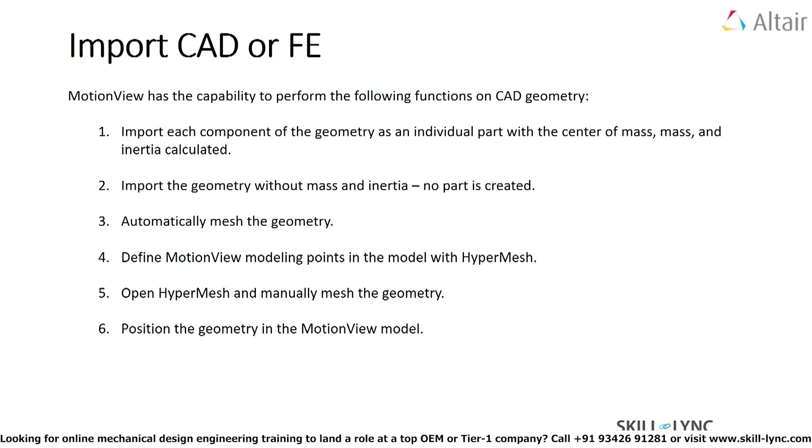Now let's discuss the various CAD or FE formats that are supported in the MotionView model. MotionView supports the following CAD or FE formats: you can import files from CATIA, HyperMesh, OptiStruct, Parasolid.

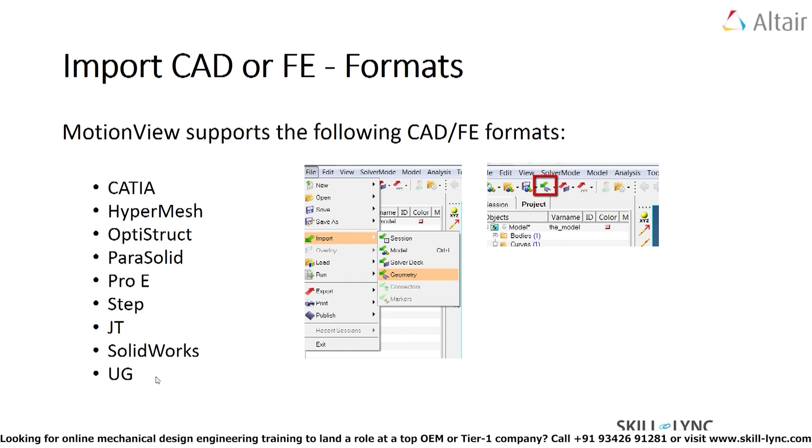It can be a Parasolid file, or from Pro/E you can import a STEP file, a JT file, any file from SolidWorks, and UG. Now let me invoke the CAD import utility by going to the graphical user interface of MotionView and show the various options available in this particular dialog box.

Switching back to the graphical user interface of MotionView, there are two ways of invoking the CAD import utility.

First, go to the File option, then go to Import, and from there you can go to Geometry. This brings up the CAD import utility dialog box.

This is one way of doing it, and the other way is by simply clicking on this particular icon which says Import Geometry on the toolbar. If you click that option, you come to the same dialog box you got earlier. This is just a shortcut.

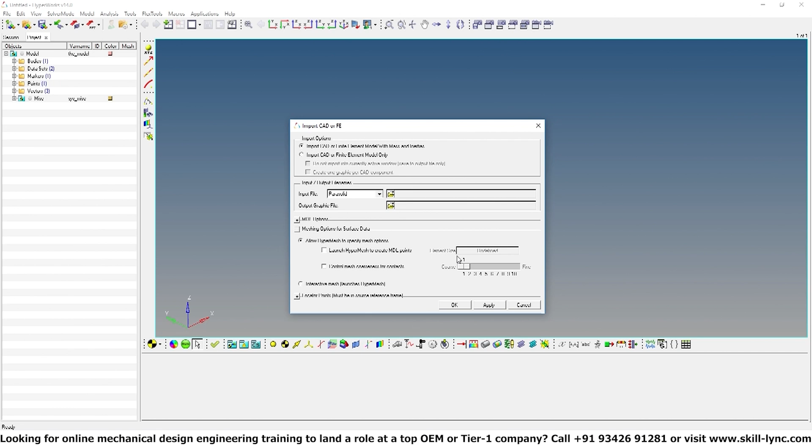Here it's divided into several sections: the import option section, the input/output file name section, the MDL section, the meshing options for surface data section, and the locator point section. These are the various sections in this particular dialog box.

Let's see what all these options refer to. Under the import options, you have two radio buttons. The first radio button, as the name suggests, is to import the CAD or FE model along with its associated mass and inertia properties.

Say you've built a model, or you have a model in CATIA, and you want to import that particular model along with its mass and inertia properties - then you'll use this first radio button. But you'll use the second radio button only to import the CAD or FE model without bringing in its mass and inertia properties.

It will just import the geometries from either a CAD file or an FE file. These are the two options available in MotionView.

Next, let's go to the input/output file name section. In the input file name drop-down menu, here are the different file formats you can specify to import your particular model. These are the extra file formats that have been added in the latest version, apart from the ones mentioned in the presentation.

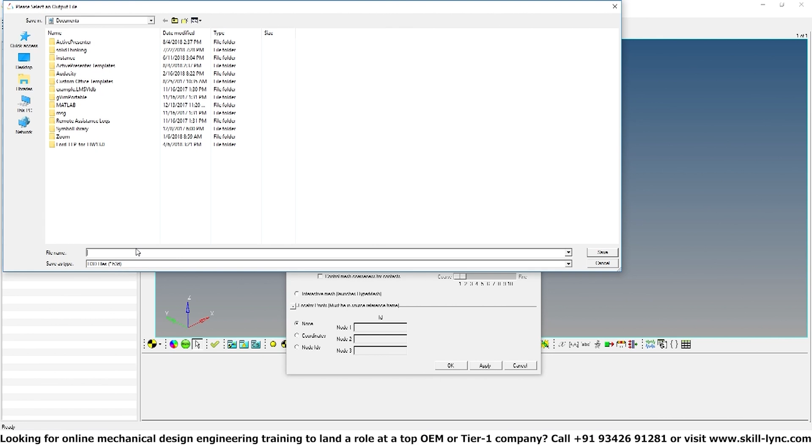You can select any particular file format, and this top folder, if you click on it, will direct you to the file you want to import. In this case, I've chosen the Parasolid file, so if there are any Parasolid files in the directory, it will point to that file. Once selected, click Open. The second folder is to save the file in H3D format. You can give whatever name you want, and it will be saved as a .h3d file that can be accessed in MotionView.

Next, the MDL options. The first radio button specifies the system under which the geometry is imported, and you can give necessary details for the body, point, graphic name, etc. You can usually leave these options as default unless you need to specify something for a specific case. Otherwise, leave this section as default. You can minimize or expand this based on your necessity.

Now let's move on to the meshing options for the surface data. This is an important section in this dialog box. If you select the first radio button, it will automatically mesh the geometry. But if you select the second radio button and say OK, it will launch HyperMesh, and you can interactively create the mesh.

When you select the first radio button for automatic meshing, you can also check the option that controls mesh coarseness for contacts. This is very useful when you come to contact simulation, covered in chapter 11. You need to be careful, because when dealing with 3D contact simulation, the two mesh geometries must have a relatively finer mesh compared to other simulations.

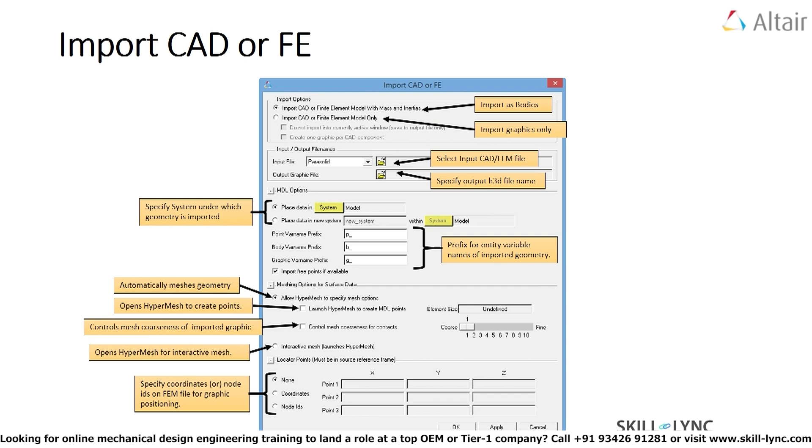So let's go back to the presentation. This is what we already covered, including the slide where I explained each of these options available in the CAD import utility dialog. This was the second part of the dialog box I was talking about, wherein after you select a particular file and hit OK, this is what you get. You can change the unit type in this option, and you can also select a particular body and change its density.

Please be aware that this can only be done during the time of the import of the file. You can't change its density later on during the model building process. So if you need to change any of the density values for any of these bodies that you're going to import, this is the time that you need to do it, while you're importing the particular model.

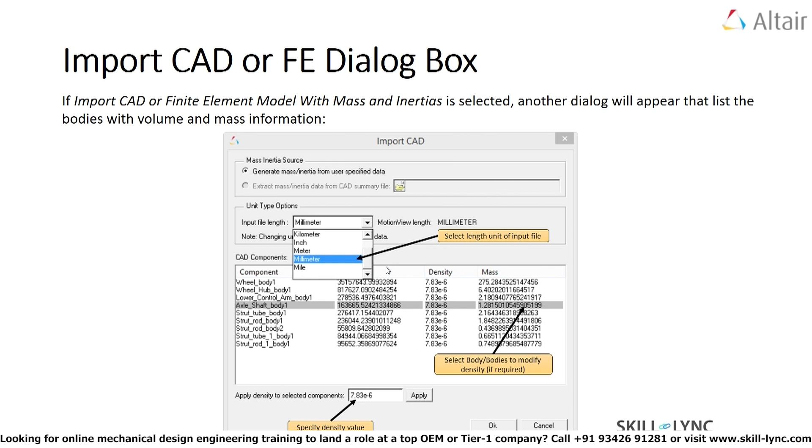Now let's move on to the next part of the presentation, which is regarding curves. Curves in MotionView are mainly used as forces, motions, and constraints. The non-linear characteristic of a force, such as spring force versus deformation, or damping force versus deformation velocity, can be represented in the form of a 2D spline. Similarly, displacement versus time or velocity versus time can also be represented as a 2D curve. We will concentrate on how the curve can be used as a constraint in the next chapter when I explain the curve-to-curve joint.

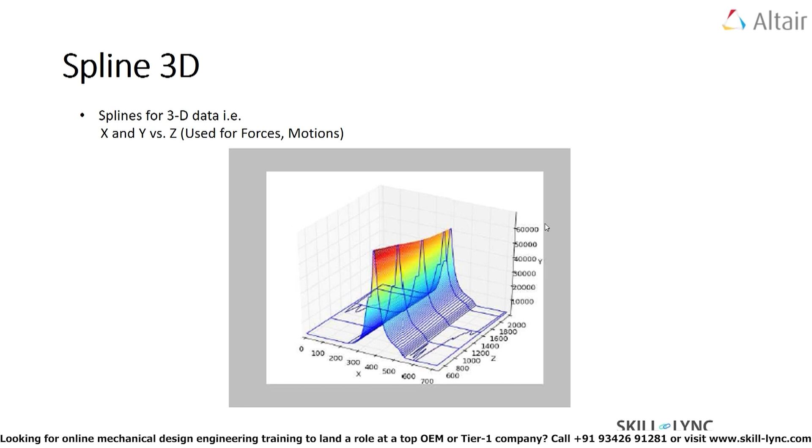The curves panel allows you to add and edit curves, and the X and Y data vectors for a single curve can come from any of the sources such as file, math, or values. For example, the X data vector can come from a file, and the Y data vector can come as a mathematical function of X. So you have the flexibility in the import spline utility.

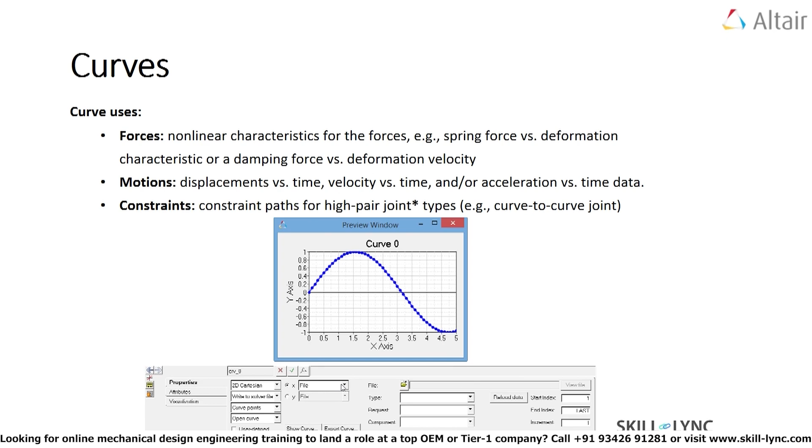This is what I was talking about. When you select the X option, the values where you have to input the X values, you can go to the drop-down list and you'll have further options. Maybe I can show that in the graphical user interface so it's more clear. Let me go to import curve. This option that you see on the screen is to import a curve.

The X values for that curve can either come from a file, like a .csv file, an Excel file, or it can also be in the form of a mathematical expression, or you can just put X and Y values here. So you can get the X values from either a file, math, or values format, and the Y values need not necessarily be from the same source. You can give this as, say, a file, import the X values from the file, and import the Y values by giving a mathematical expression to create a function between the X and Y. These are the flexibilities that you have while importing a curve in motion.

In this slide, I'm trying to cover the interpolation or extrapolation functions using curves. Since the data in a curve is at discrete points, a function must be used to either interpolate or extrapolate the data for times when there is no direct data available at a point in the curve.

So the interpolation can be done either by using Akima, specified as AKISPL format, or the cubic, specified as CUBSPL, or the quintic, QUISPL, interpolation methods. These are the three interpolation methods available in MotionView, and these functions are supported in the MotionSolve expression language. Now I'll try to explain each of these in detail.

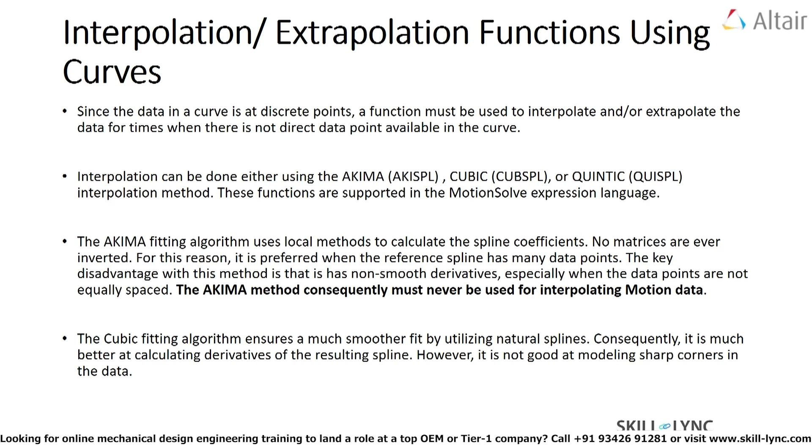For splines with two independent variables, such as 3D splines, the interpolation along the second independent variable is always linear, regardless of the choice of interpolation along the first independent variable. So the interpolation or extrapolation algorithm you need to use is completely application dependent. I've tried to use some of the best algorithms for a couple of cases, but if you're building your own model, you'll have to explore which particular interpolation method suits it best. It's totally application dependent.

I'll be explaining one of the functions we'll be using in this particular chapter's exercise demo: the DX function. This DX function computes the X component of the relative translational displacement of marker I with respect to marker J, as resolved in the coordinate system of marker K.

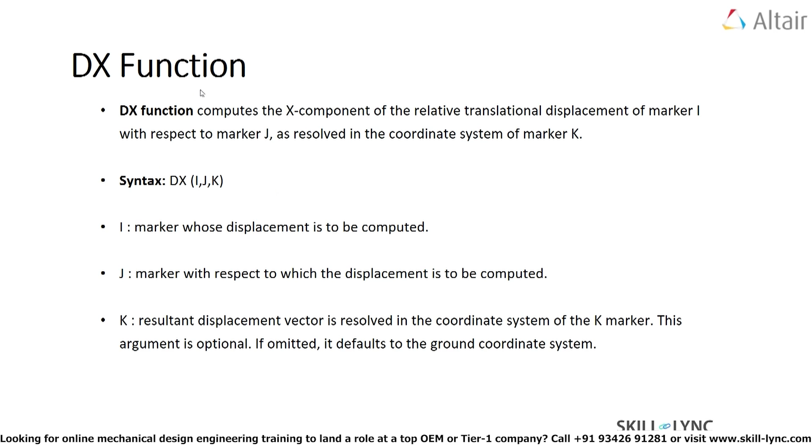I think it will become more clear when I explain this function while using it in the exercise demo. Now let's move on to the HyperView collision detection algorithm.

In this chapter, we'll try to simulate the automotive trunk lid mechanism, as I mentioned earlier, using the four-bar mechanism we've built so far. This is the first module that will use all the basic knowledge we've learned so far, and we'll try to stitch that together and use it in this particular exercise demo.

When we simulate this model in HyperView, it allows you to view and detect collisions between the graphic objects of the current animation model during simulations. This is a very special capability present in HyperView, and we'll be making use of it in our exercise demo. In order to activate this option, you need to do the following.

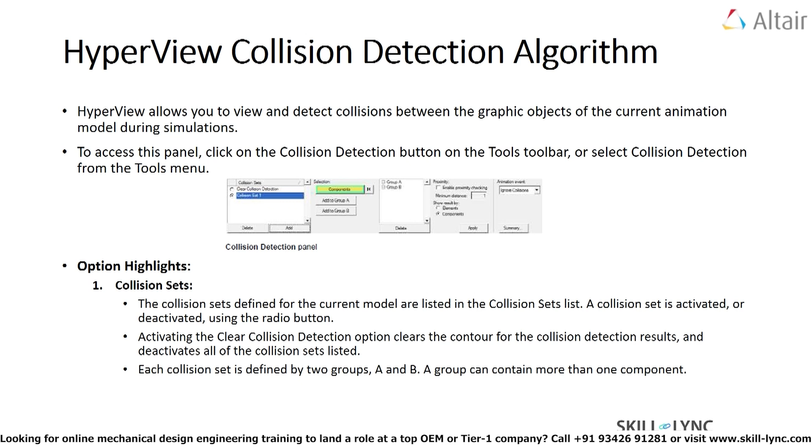Just follow along—I'm going to switch back to the graphical user interface to show that. So from MotionView, I'll be switching back to HyperView. In order to have that option enabled, it's already available on my screen because I've already enabled it: the collision detection icon.

But if it is your first time, you won't have this icon on your toolbar. In that case, you have to go to View, then Toolbars, then HyperView, and enable the Tools option. You can see that if I disable this, the collision detection algorithm icon disappears from the toolbar.

So you need to go to View, Toolbars, HyperView, and select the Tools option to get the collision detection algorithm icon on your toolbar. Now let me explain the different options available in this collision detection algorithm. There are 4 important things you need to know in this panel. The first is the collision sets.

The collision set is defined for a current model in this section. Then the next section of this panel is the selection, where you'll be selecting the components which you need to add to group A and group B. And then it is the proximity section.

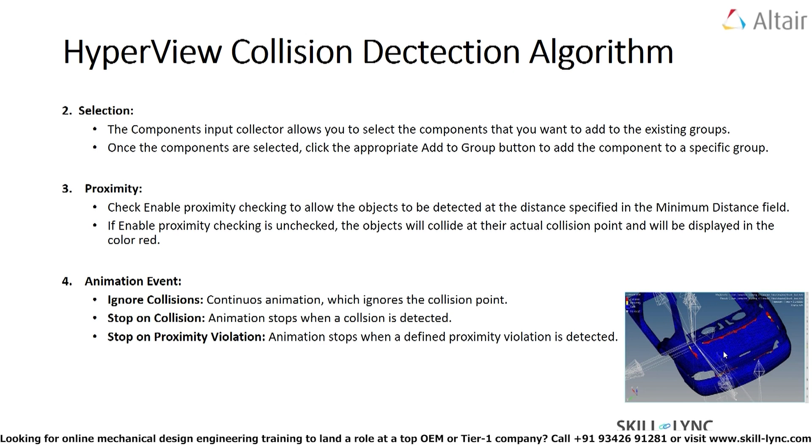But if I had selected the components option, this entire trunk lid would be red in color. The whole thing would be highlighted.